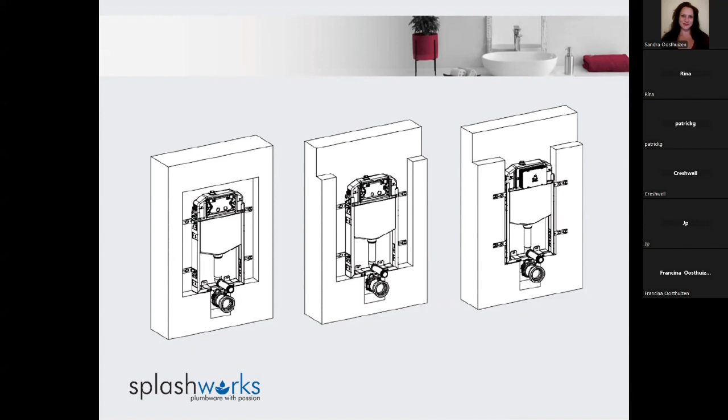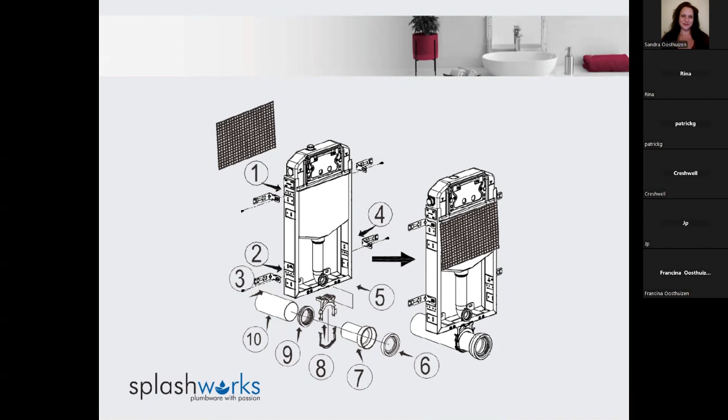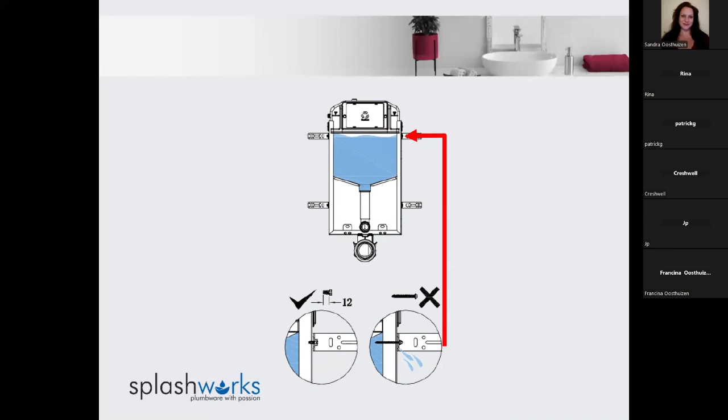Just as a quick one, a lot of people are afraid that the pan's not going to hold their weight because it's only these two little bolts and it's built into the wall and everything. But the cistern is rated to carry 400 kilograms. Now, I don't think any two people together on the pan are going to get to 400 kilograms. If a person does weigh 400, he's not going to be able to get up and walk to the toilet in any case. So I think we're quite safe with that weight rating on there.

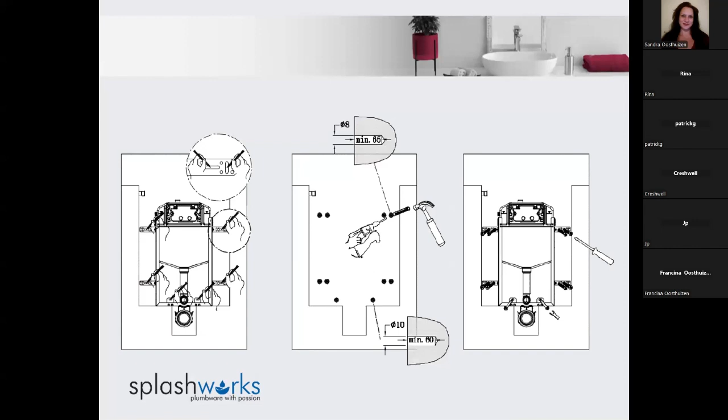At the moment, these cisterns only have a top inlet water connection. From the next shipment that we are receiving, there will be a dual inlet. You'll have the option either of top or side inlet. So that is something definitely to look forward to.

And also, the reason why you flush it for so long is because sometimes there's dirt further down the line that now has to be moved closer to the end. Otherwise, your inlet valve is going to get blocked up and it's going to start leaking and not shut off.

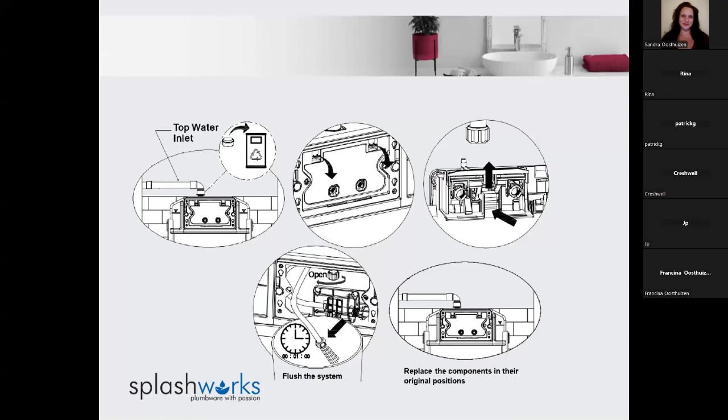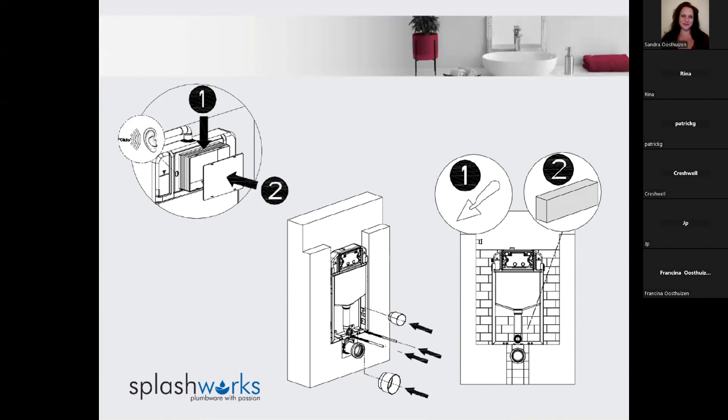Also make sure that you put all the caps over the flush pipe and the drain pipe, just to make sure that no mortar or anything gets into there while they are busy building it and plastering it. There on the right-hand side, obviously, they've now built it all in.

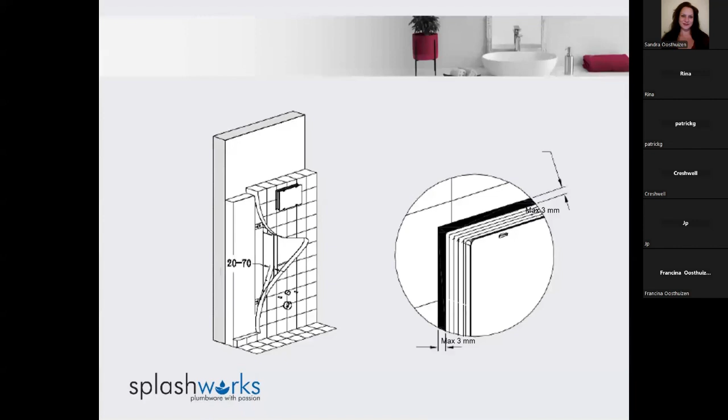Once they tile up against that tiling box, you'll see on the right-hand picture, it says a maximum of 3 millimeters. So you can tile right up against that box. There mustn't be more than a 3 millimeter gap that they leave there, because otherwise your actuator plate is not going to cover the gap that is left there.

Once you've done all that, now the tiling is done, you can unclip the front of that tiling guide and then cut it back to up against the tiles. That gives you a beautiful clean edge that your tiles are up against. You would then assemble your actuator plate onto it. And remember, the actuator plate does not come with the system. You have to actually select, and we've got a selection of actuator plates that we'll go through, the different styles and so forth, just now.

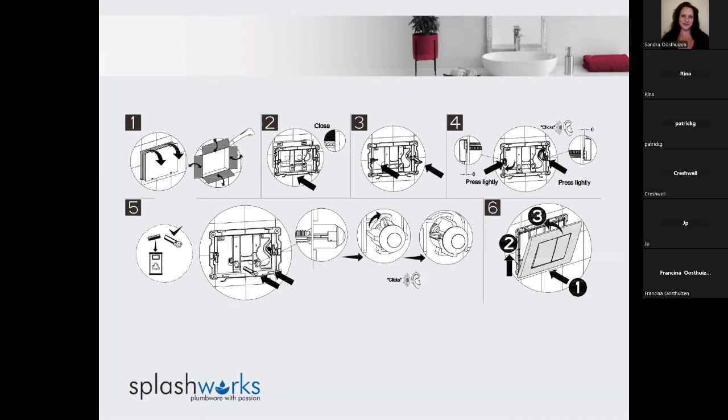You would then remove all your little plugs and the flush pipes, etc., so that you can now connect the toilet to it. It is always a good idea, at the back of the toilet, before you put it onto the bolts, to just put a thin bead of silicone on there.

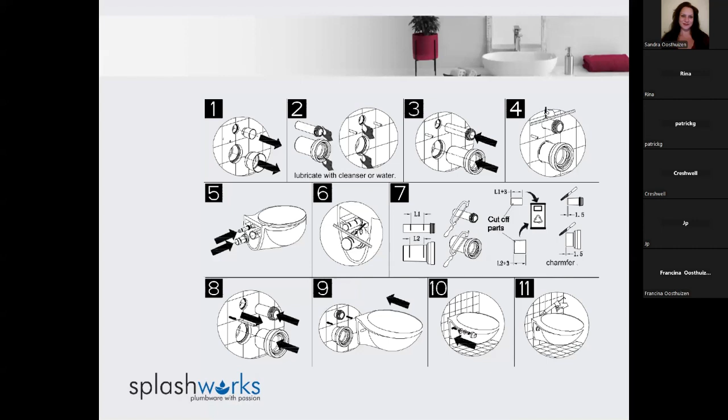Not only does it prevent any dust and stuff or liquid from falling into the back of it when you're cleaning, but I've sat on some wall-hung toilets, and you hear it creaking, and I think that's why some people are worried that it's not going to take their weight. But what actually happens is there's minuscule movement, and it grates the toilet pan against the tiles. You put that little bead of silicone, and it just prevents that from happening. So it's just a bit of user comfort and reassurance.

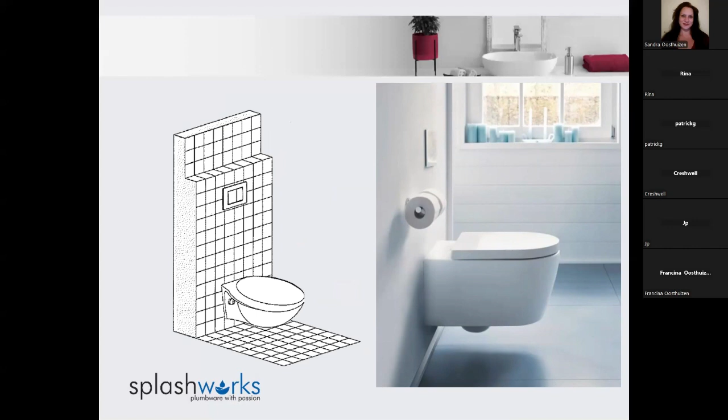There your pan is now installed. You can see there's a beautiful little lifestyle picture, and I'm sure you guys have all seen them installed before. For actuator plates, we've got 3 different colors: the white, the chrome, and the black. And it comes in 3 different patterns: the vertical squares, 2 circles, and then the horizontal squares.

It comes with a dual flush. Your cistern can be adjusted from a 9 to, I think it's a 6 liter for the full flush, and then your half flush is normally about 3.5 liters, which is the standard. It's not adjustable. Guys, that's my story on concealed cisterns. I don't know if anybody has got any questions.

Patrick, I've got one. You said that we can use the concealed cistern with a floor pan as well? Yes. You would just then put it lower. The pan would then be up against the floor, and your flush pipe that comes out, you will just make sure that it comes out at the right height. Obviously, you're not going to use the pan connector side of the system because your pan is going to be quite a bit lower, so you would just use a normal pan pipe through the wall. Okay, thank you.